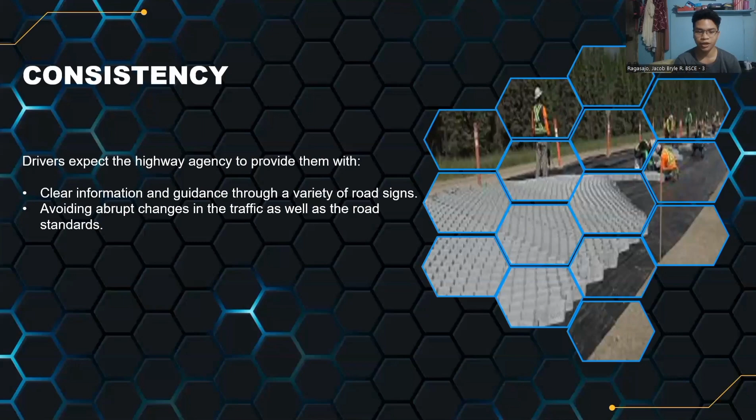AASHTO is the American Association of State Highway and Transportation Officials. In 1914, the American Association of State Highway Officials, or AASHO, was established as an association of state, territorial, and District of Columbia highway departments and the Federal Highway Administration. The name was expanded in 1973 when the Department of Transportation was integrated into the association, renaming AASHO to AASHTO, giving the officials of this agency the power to govern its operation.

Engineering activities were implemented by standing committees with the task of preparing specifications, manuals, and standards representing the current highway engineering practice. AASHTO publications include transportation materials specifications and tests, specifications for highway bridges, geometric design standards, and numerous policy statements and guides.

AASHTO publications are authoritative, meaning they are reliable, so all the information that AASHTO publishes is accurate or true. References are made in these books and periodic manuals. The association also publishes the AASHTO quarterly reports on current highway and transportation subjects, including trends, forecasts, and legislation.

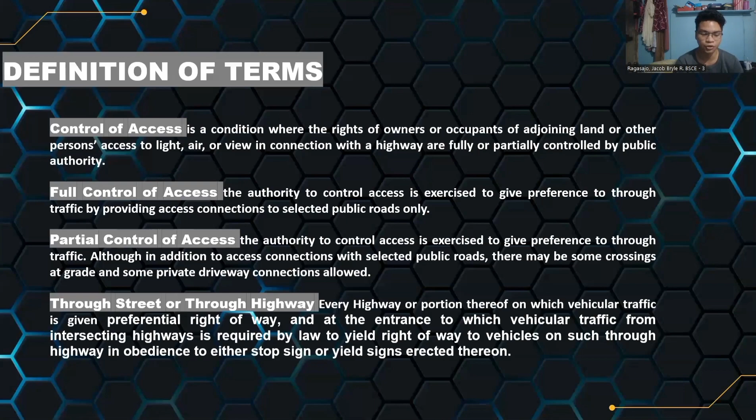Parkway is an arterial highway for non-commercial traffic. It is a wide road, usually divided, with an area of grass and trees on both sides and in the middle.

Arterial street is an arterial route that carries traffic to the nearest access point or through traffic. It often serves as the most advantageous route for relatively long distance travel. It is a road without controlled access that can carry a large volume of local traffic at a generally high speed, being below controlled access highways in the hierarchy.

So these are the basic considerations in planning arterial roadways. First is the selection of the routes, studies of the traffic volume, origin and destination, accident experience. Width should not be less than 15 meters, must carry at least one lane of traffic in each direction, should be at least 1 kilometer in length, should skirt neighborhood areas rather than penetrate them.

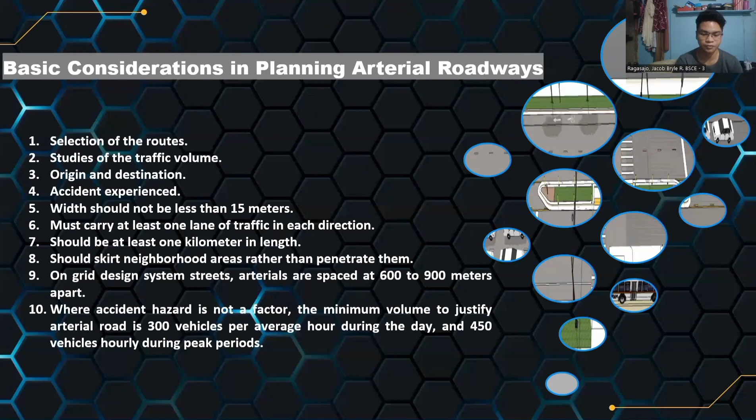On grid design system streets, arterials are spaced at about 600 to 900 meters apart, and where accident hazard is not a factor, the minimum volume to justify an arterial road is 300 vehicles per average hour during the day and 450 vehicles hourly during peak periods. And sometimes peak period volume on a designated arterial road exceeds the capacity of a two-way street. And to increase the arterial capacity, the following solutions are enforced.

During peak hours, parking is prohibited on one or both sides of the streets. Parking is prohibited several meters away from each side of the road, intersections, or corners. Right turn is allowed on red signals anytime with care. Left turns are eliminated at congested intersections, and the direction of the traffic is reversed in a center lane to provide more lanes in the direction of heavier traffic flow.

Collector streets. Collector streets form a smaller mesh grid pattern where passengers are picked up from service streets and carried to the arterials. So more like sumpay ni siya sa arterial roads or like a street padong sa arterial roads.

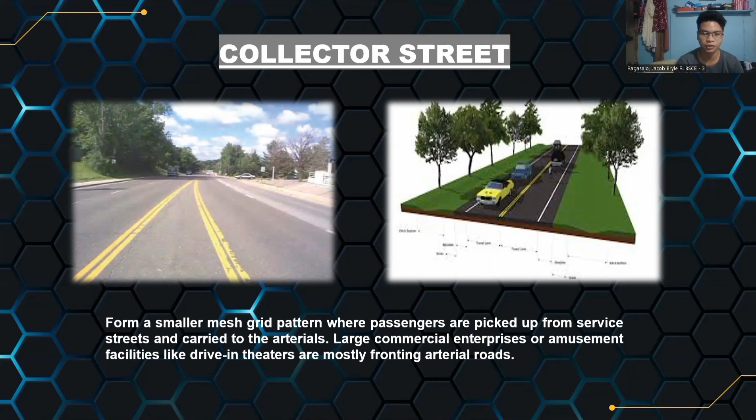So local road. Well, local road is defined as a street or road primarily for access to residents, business, or other adjoining properties. It is also defined as a road constructed and maintained by a local government. So it also refers to streets or roads na mo-accept og traffic from collector roads or streets and distribute the traffic through subdivisions, neighborhoods, and business areas.

So highway capacity. Highway capacity is defined as the maximum number of vehicles that are reasonably expected to pass a given point over a given period of time, usually expressed as vehicles per hour. So under ideal conditions, one freeway lane can accommodate about 2,000 passenger cars per hour, and a two-lane road can carry up to 1,000 passenger cars per hour in each direction. So there's an obvious relationship between vehicle speed and highway capacity. As the volume of traffic approaches capacity, the average speed is markedly reduced.

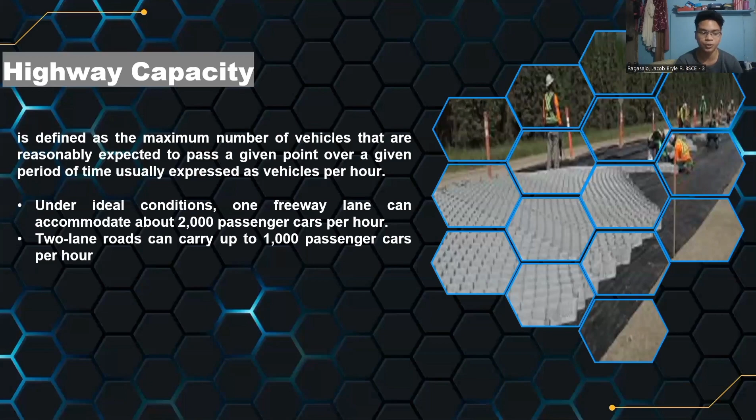Average annual daily traffic, or AADT, refers to a traffic volume or flows on the highway as measured by the number of vehicles passing a particular station during a given interval of time. It is also called average daily traffic if the period is less than 1 year. Volume may be stated on hourly observed traffic or estimated 30th hour volume commonly used for design purposes. This is determined by counting the total number of vehicles to cross a point in both directions on a highway during a year, and divide this value by the number of days in a year. So 365 days it divides, yeah.

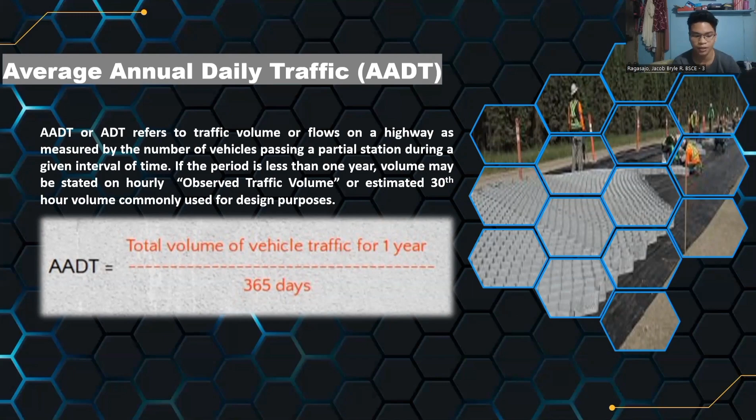So next is the design speed. There is no single set of geometric standards that will apply to all highways. For every highway segment, decisions regarding appropriate control for each of the many details or requirements must be addressed individually or separately. AASHTO defined design speed as the speed determined for design and correlation of physical features of a highway that influence the vehicle's operation. It is the maximum speed that can be maintained over a specific section of the highway when weather and traffic conditions are so favorable that the design features of the highway govern.

So, basic design features refers to the tightness and superelevation of curves, the sight distance, and the grade. So the design speed is basically higher than the anticipated average speed. And AASHTO recommended that the design speed be set to the greatest degree possible to satisfy the needs of nearly all drivers, both today and throughout the road's anticipated life. For economic reasons, the geometric features of certain road sections are designed for speeds from 30 to 50 kilometers per hour. Selection of the proper road design speed is one of the most important decisions to make because it sets the limit to curvature, sight distance, and other geometric features.

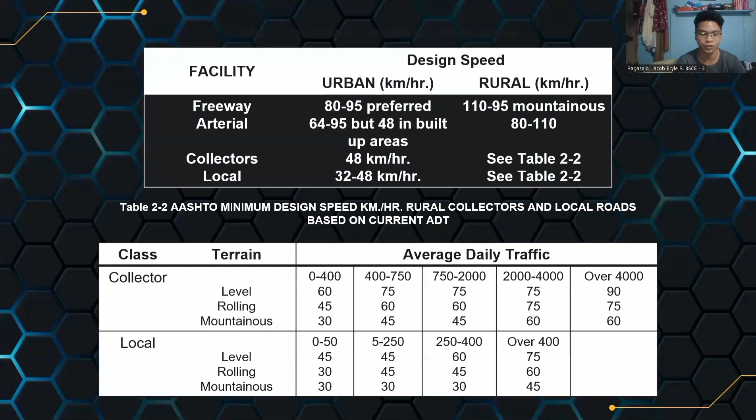So next is the cross-section of a typical highway. The cross-section of a typical highway has a latitude of variables to consider, such as the volume of the traffic, character of the traffic, speed of the traffic, and characteristics of motor vehicles and of the driver. Highway design usually adopted a cross-section that is uniform in thickness from end to end of the improvement.

This is acceptable on high-volume traffic road facilities, but for low-volume traffic facilities, modifications of features like shoulder width in rough areas are usually employed to reduce cost. So a cross-sectional design generally offers the expected level of service for safety.

And recent studies showed that a 7.20 meters wide pavement has 18% fewer accidents compared with a pavement narrower than 5.50 meters wide. And a 7.20 meters wide pavement has 4% fewer accidents than a 6 meters wide paved roadway. Accident records show no difference between 6.60 meters and 7.20 meters wide pavement.

For the 6 meters, 6.60 meters and 7.20 meters wide pavement with 2.70 to 3 meters wide shoulder, recorded accidents decrease by 30% compared to 0 to 0.60 meters wide shoulder and 20% compared with a 0.90 to 1.20 meters wide shoulder. It appears that the above difference in accident potential may not justify higher standards, particularly when traffic volume is low.

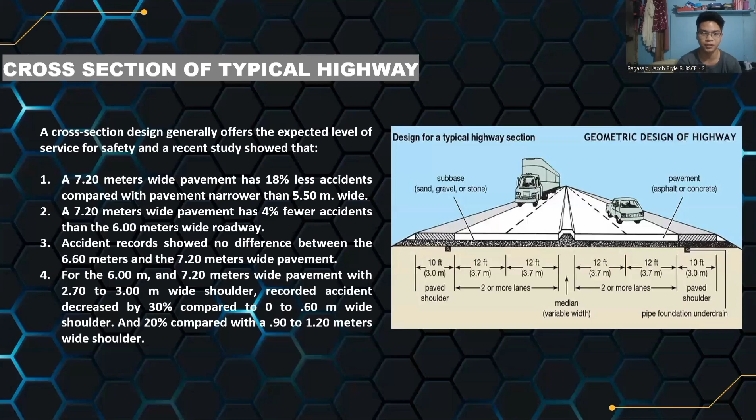For two-lane rural highways, a 7.20 meters wide surface is required for safety clearance between commercial vehicles and recommended for main highways. So in the cross-section of a typical two-lane highway, a 7.20 meters wide surface is required for safe clearance. And for collector roadways, a 6 meters wide surface is acceptable only for low volume traffic, including few trucks traveling thereon.

And for local rural roadways, the minimum surface width is 4.80 meters for a 30 km per hour design speed. And for urban roadways, the minimum design width is 3.60 meters, although 3 meters is also allowed where space is limited.

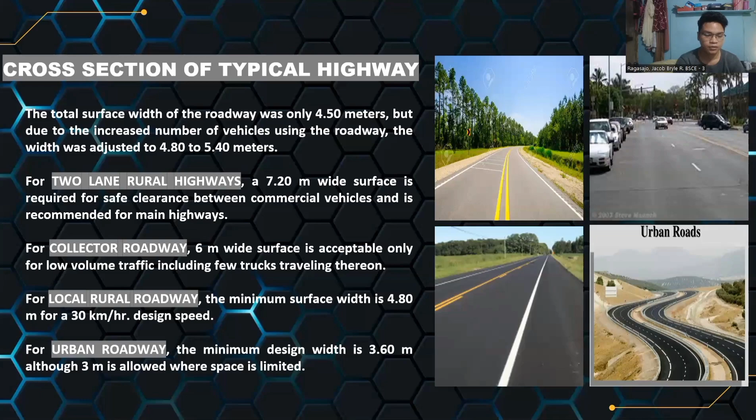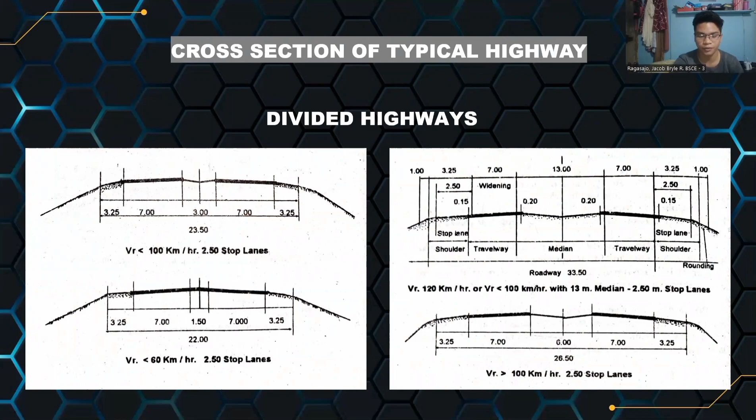Next is the road shoulder. Road shoulder or verge is defined as that portion of the roadway between the edge of the traffic lane and the edge of the ditch, gutter, curb, or side slopes.

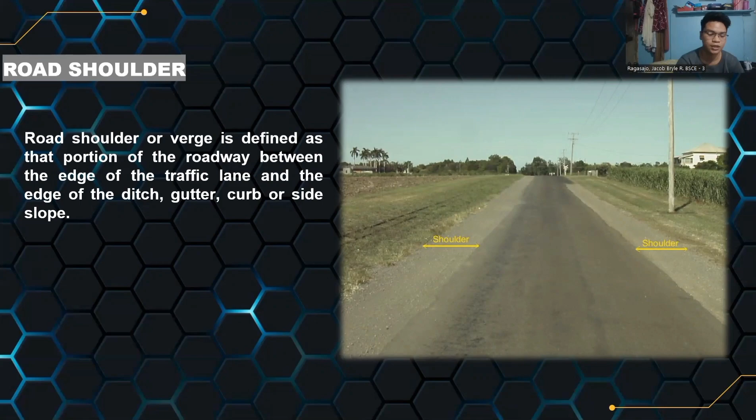So, the importance of road shoulder. Road shoulder serves as a place for vehicles to stop when disabled or for some other purposes. Road shoulders considerably reduce road accidents. The road capacity is decreased and accident opportunity increases if the shoulder is too narrow or omitted in the design.

Shoulder should be continuous along the full length of the roadway.

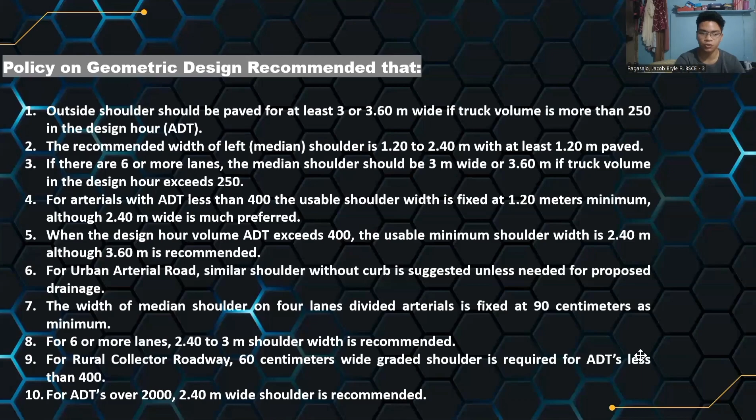For urban arterial roads, similar shoulder without curb is suggested unless needed for drainage purposes. The width of the median shoulder on 4-lane divided arterials is fixed at 90 centimeters as minimum. For 6 or more lanes, 2.40 to 3 meter shoulder width is recommended. For rural collector roadway, 60 centimeters wide graded shoulder is required for ADTs less than 400. And for ADTs over 2,000, 2.40 meters wide shoulder is also recommended.

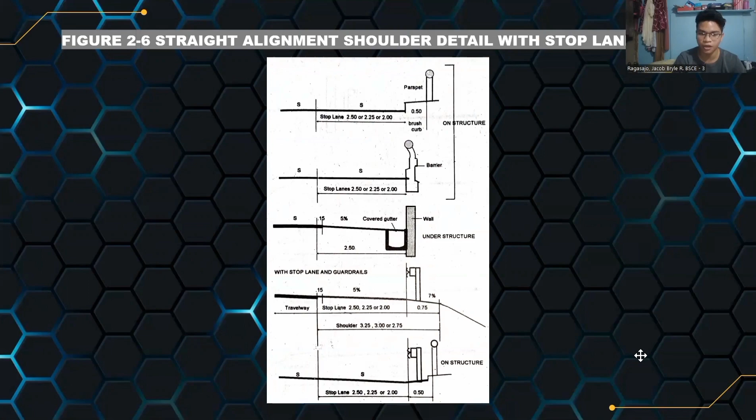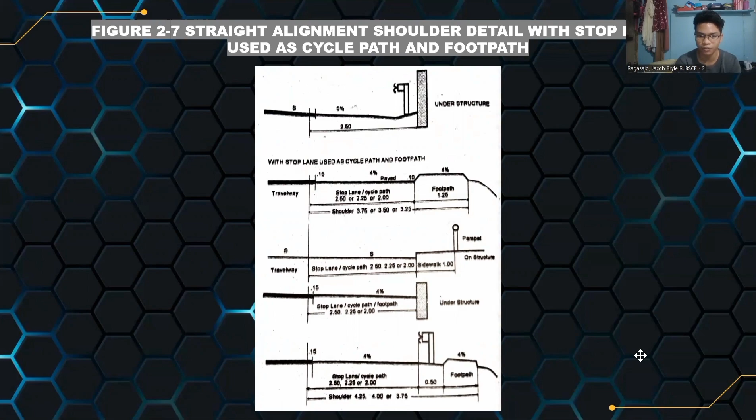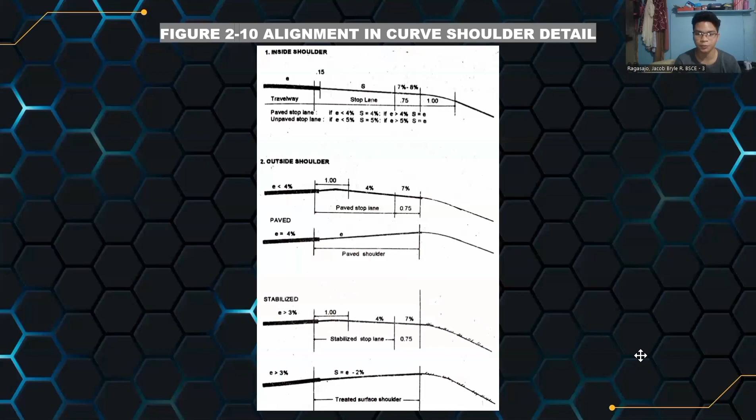Good day everyone, I am Luijan Equipado and today I'm going to discuss my assigned topic. The first topic is the cross slope. So what is the cross slope? The cross slope is provided in all tangent sections of the roadway. Slope usually falls in both directions of the center line of the two-lane highway, except where the super elevation of the curves directs all the water towards the inside.

Here I have a picture of a cross slope example. It's basically two slopes that cross each other at the center line of the roadway. For a high type pavement, the crown or slope is often in the 1% to 2% range. However, steeper slopes are strongly recommended. So here we have an example of the 1% to 2% slope, and as you can see, the example of the crown road is just like the road outside that has a 2% slope.

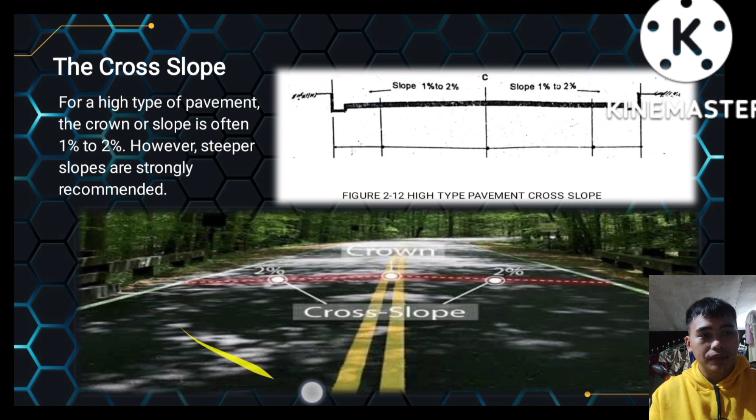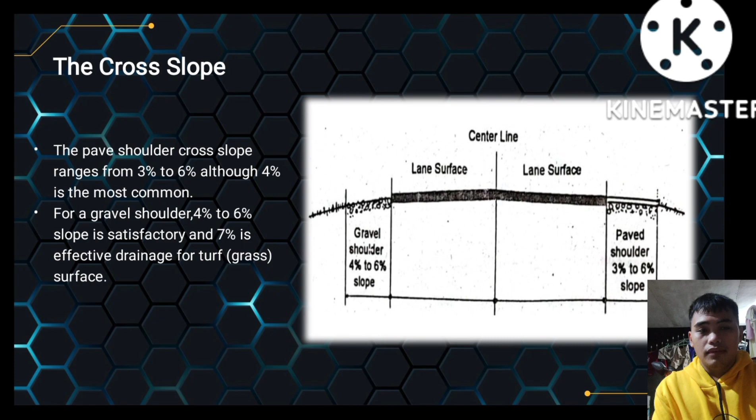So what is the purpose of the cross slope or steeper slope? The purpose is to reduce water on the road so that the driver can have a safe and comfortable driving experience. The cross slope also has a shoulder. It can be a paved shoulder or gravel shoulder. The paved shoulder cross slope ranges from 3% to 6%, although 4% is the most common. For the gravel shoulder, 4% to 6% slope is satisfactory, and 7% is effective drainage for turf surface.

Here I have an example of the paved shoulder and the gravel shoulder. The paved shoulder is made of cement, while the gravel shoulder is made of gravel or smaller rocks. There are also many types of road slope. The first is the cross slope, the most standard one. The second is the parabolic slope. It's only applicable if the gutter is deep enough to support draining water on the road, while if the gutter is not deep enough, it's advisable to use the combination of uniform slope with the parabolic curve. That's the third type of slope.

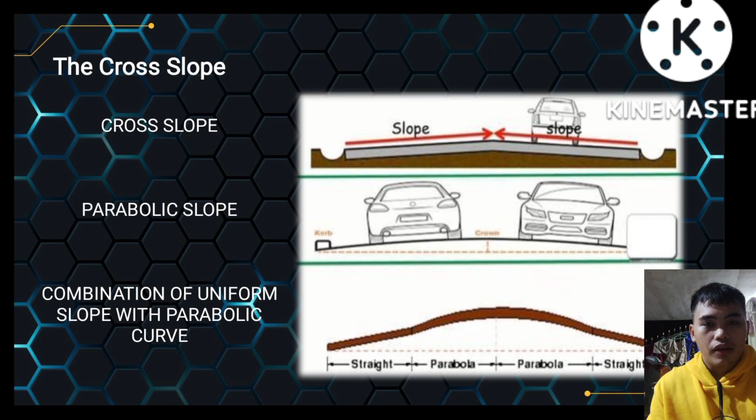Now we're going to move on to the next topic, the cut or fill slope. What is the cut or fill slope? From the word itself, cut means to reduce, and fill means to add. Here I have an example of cut or fill slope. As you can see in the picture, the mountain has been cut through and built with the road. On the left side of the picture, you can see the cut slope or back slope, and beside or at the bottom of the road, you can see the fill slope

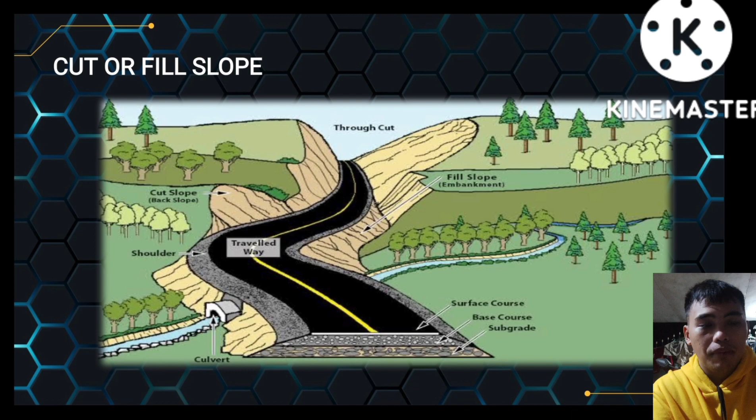So here, earth fill of normal height is safe on a slope of 1 and 2 ratio. Second is slope of cuts through an ordinary undisturbed earth fill remain in place with the ratio of 1 and 1 slope. Cuts could be as steep as 1 and 2 ratio, and sometimes 1 and 4 ratio proven to be stable.

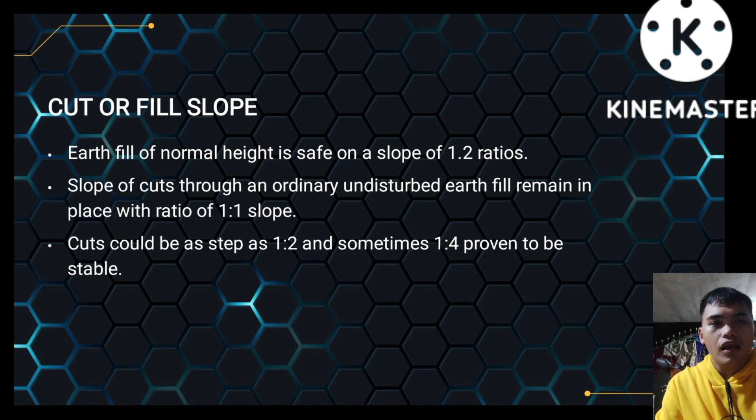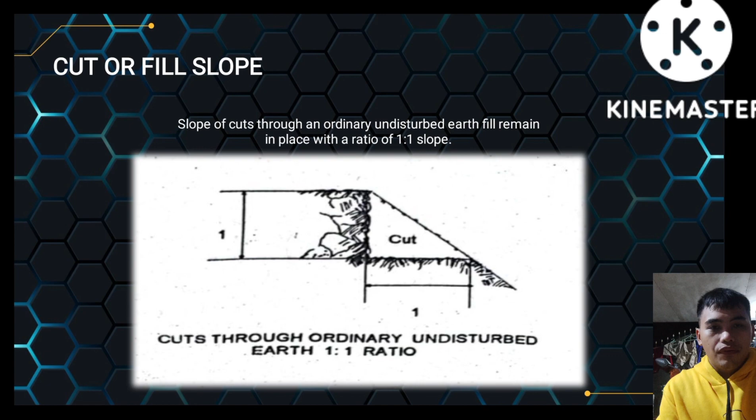Now we're going to talk about the advantages of the flat side or back slope. The first advantage is with a back slope of 3 and 1 ratio or even flatter, cars could be directed to back into the road and will come to stop or continue down the slope with no risk of overturning. Second, flat fill slopes are visible from the vehicle at full extent, giving the roadway a safer appearance.

Third, with a visible slope being low and flat, vehicles could be positioned or parked closer to the edge, and on two-lane roadways, parking would be farther from the opposing traffic.

There are also recommended policies on geometric design. We have three. First one is the 6:1 slope ratio be adopted on embankments less than 1.2 meters high and 4:1 on a higher fill. Second is the 1 and 2 slope ratio is allowed to height greater than 6 meters.

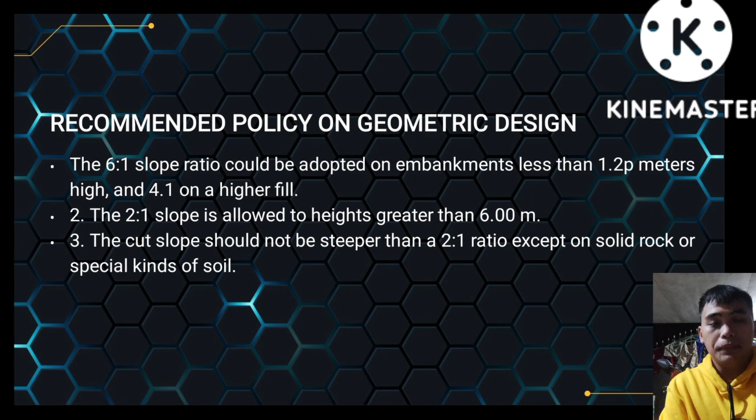Number 3, the cut slope should not be steeper than a 2:1 ratio except on solid rock or special kind of soil. Here is an example of the rock cut ratio from 1 and 2 or 1 and 4. It's only applicable on a special kind of soil or rock types.

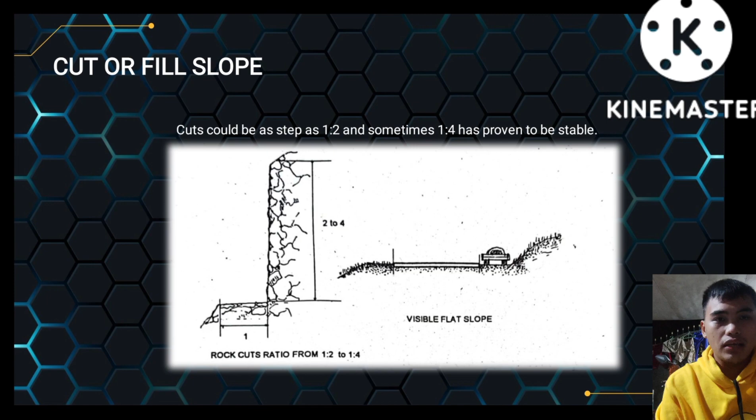The AASHTO also has a policy stipulated that where cut or fill slopes intersect the original ground surface, cross-sections must be rounded to blend the slope with the natural ground surface. When the side slope requires embankment with a suitable retaining wall, any of the following materials could be used depending on the natural condition. Here I have a first illustration or picture of the AASHTO policy.

The materials that could be used depending upon the natural condition for the retaining wall are first, hand-placed stone. Second, cement rubble masonry. Third, concrete blocks. 4, conventional reinforced concrete. 5, T or counterfort design. 6, cribs assembled from timber. 7, precast concrete. 8, metal elements. 9, tied back piling. And 10, lastly, earth reinforced with metal or plastic bands.

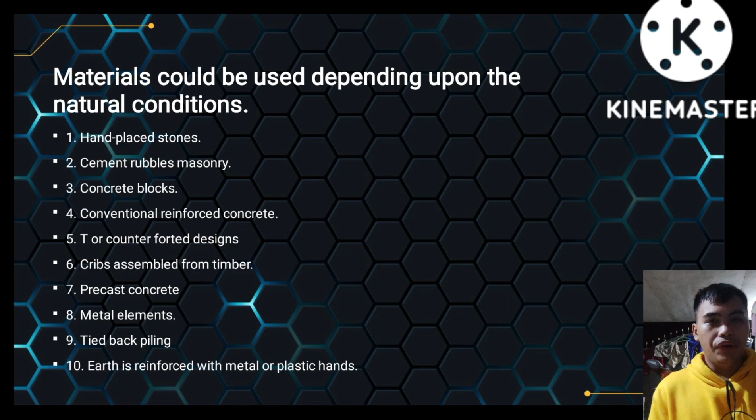The number of lanes. The number of lanes in a segment of highway is determined from the estimated volume for the design year AADT and highway lane capacity at the expected level of service. AASHTO policy accepts a dually divided 16-lane roadway with 4 lanes in each direction for an inner freeway and 4 more lanes in each direction on the outside.

Next is highway median. So what is a highway median? From the word itself, it means road and something in the middle of the road. It could be a barrier or flat surface with plants or signs. For example, the road near the Park Mall. As you can see, the road there has many types of medians, and its purpose is to prevent accidents.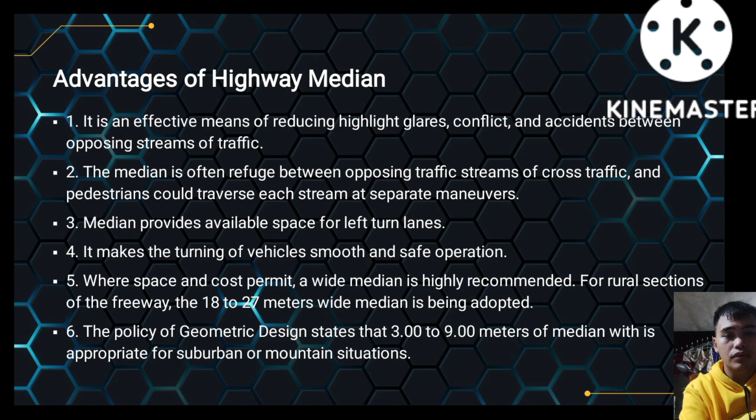Number 6. The policy of geometric design states that 3 to 9 meters of median is appropriate for suburban or mountain situation. Number 7 is for rural or urban arterials, 18 meters median or wider is preferable because it allows the use of independent profile and at the same time minimizes the crossover accident.

Number 8. Median with 6 to 18 meters wide allows drivers to cross each roadway separately. A 4.2 to 6.6 meter median will provide protection for turning vehicles. Number 9. Curbed median with 1.2 to 1.8 meter width serves as partition separation of opposite traffic and traffic control device.

Number 10. The width of traversable median should be wide enough to prevent vehicles running out of control from reaching the opposite traffic. Number 11. The 15 to 24 meter distance between lane edges is favored, but a specific value is not stipulated. Number 12. Cross slope of the median should not be greater than 6:1, but preferable is 10:1. Lastly, dense planting of rows of hedge serves as safe crash barriers.

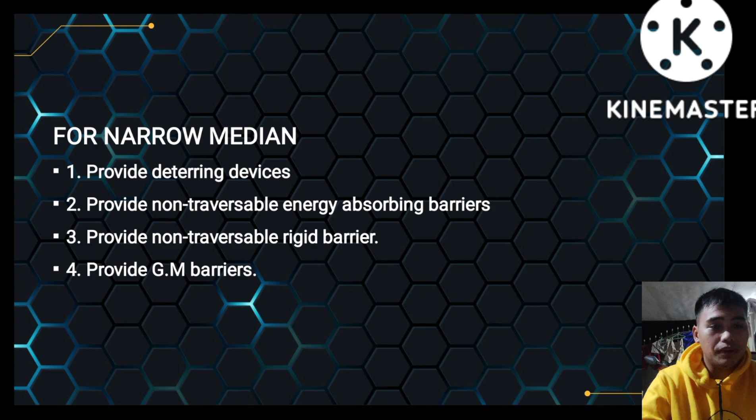For narrow median, you need to provide the deterring device, non-traversable energy absorbing device, non-traversable rigid barriers, and GM barriers. The deterring device is 2 sets of double stripes painted on the existing pavement, raised diagonal bars, low curbing, and shallow dishes. Non-traversable energy absorbing device: the chain link fence is 1 meter high and supported by steel posts and augmented by cables at the bottom and the midpoint.

Non-traversable rigid barriers are metal guardrails. And lastly, GM barriers are high non-mountable sloped face concrete barriers called New Jersey. It is cast or extruded in place or precast in sections and set in position by the crane.

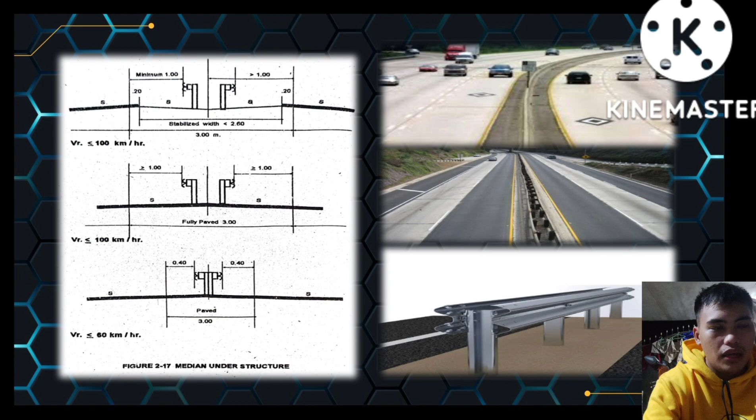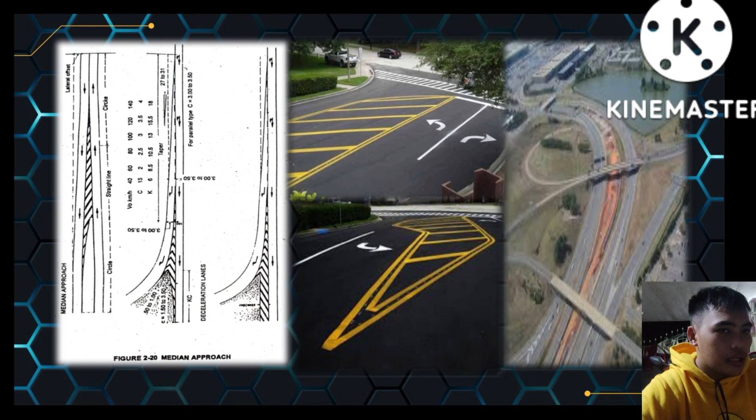And here I have an example of the deceleration lane and insertion lane. As you can see in the picture, the arrow here is saying that it is the traffic flow and you don't have to slow down here. Well, here as you can see, there is an arrow that forms a parabolic curve towards the posted safe speed for ramp, or it is called the slow down after turning into the deceleration lane.

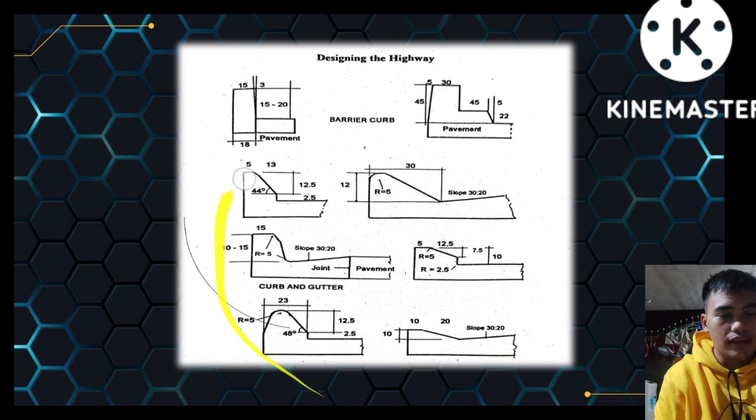And here are the design or the examples of barrier curbs. As you can see, they have different kinds and shapes, and also have a curb and gutter here. You can see this kind of barriers and curbs in the side of the road.

So the grade line provides a line of design on where to build a road. It also shows us which part of the mountain will be cut off and which will need to be filled up with soil.

So in laying the grade line, the designer must consider the following. The first is where earthworks is minimal and consistently meeting sight distance in relation to grade line. The economy is one of the main considerations. Second, in mountainous areas, the grade line must be considered to balance excavation against embankments to get minimum overall cost.

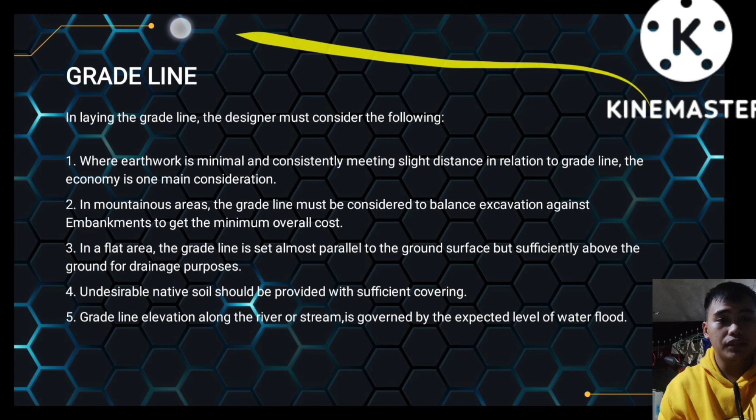Vertical curve over crest. Crest vertical curves are curves that connect inclined sections of roadway, forming a crest, and they are relatively easy to design.

The principal control in the design of crest vertical curves is to ensure that minimum stopping sight distance, or SSD, is available throughout the vertical curve.

All vertical curves should not be shorter than the established minimum over crest. This is governed by the sight distance requirements, but sometimes a case of riding may demand longer curves than the sight distance. Some designers prefer no vertical curve to be shorter than 300 meters.

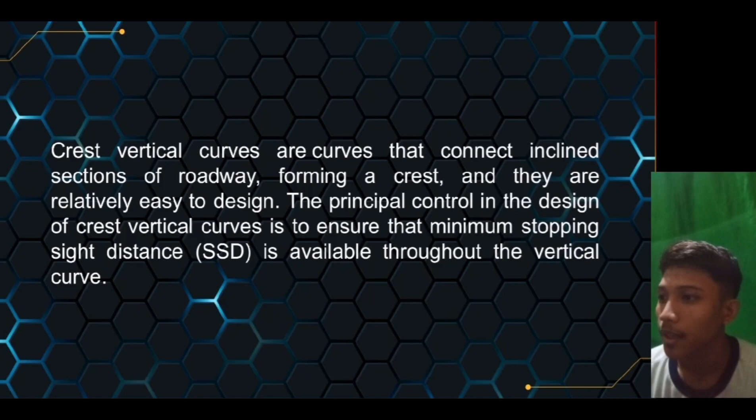The minimum curve length was suggested by AASHTO, the American Association of State Highway and Transportation Officials, to be 8 times the velocity in kilometers per hour for a distance in meters.

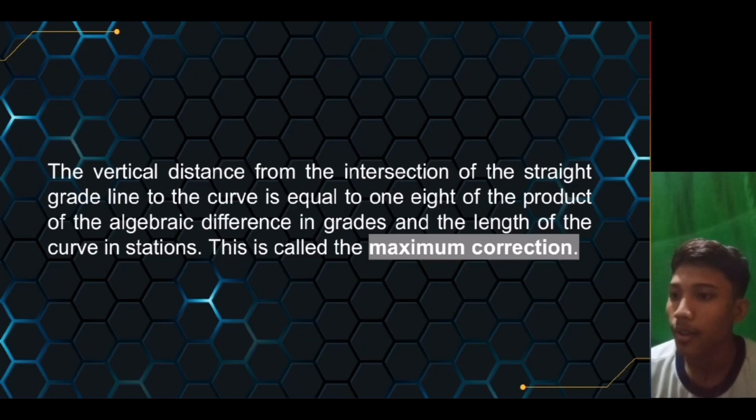The vertical distance from the intersection of the straight grade line to the curve is equal to 1/8 of the product of the algebraic difference in grades and the length of the curve in stations. This is called the maximum correction.

The rate at which the curve departs vertically from both tangent grade lines is proportional to the square of the horizontal distance from the end of the curve.

The correction at any intermediate point is obtained by: 1, multiplying the maximum correction by the square of the horizontal distance between the near end of the curve and the point. 2, divide this product by the square of 1/2 the length of the curve.

The sight distance and the length of the curve can be related to each other in one of two ways. The first possibility is that the sight distance is less than the length of the curve. Alternatively, the length of the curve could be less than the sight distance. This is the illustration.

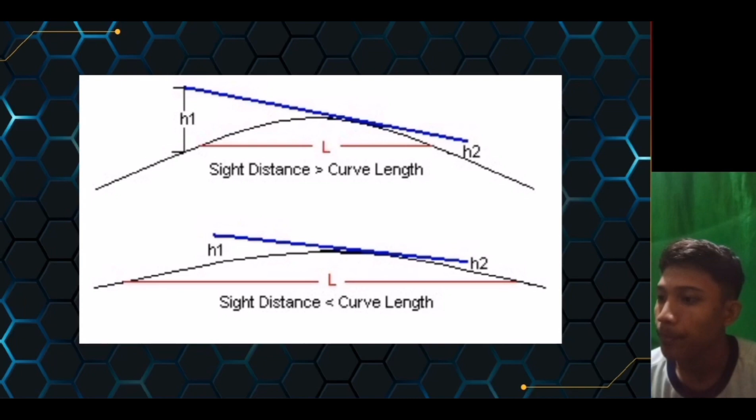Right of way. Railway right of way means a strip of land that is granted through an easement or other mechanism for transportation purposes. A right of way is reserved for the purposes of maintenance or expansion of existing services within the right of way.

It is a right to make a way over a piece of land, usually to and from another piece of land. A successful freeway and expressway operation closes the roadway from direct access to adjoining property and some local roads or streets. If local traffic and land use are to be opened, it must be served by service roads originally planned as part of the main freeway.

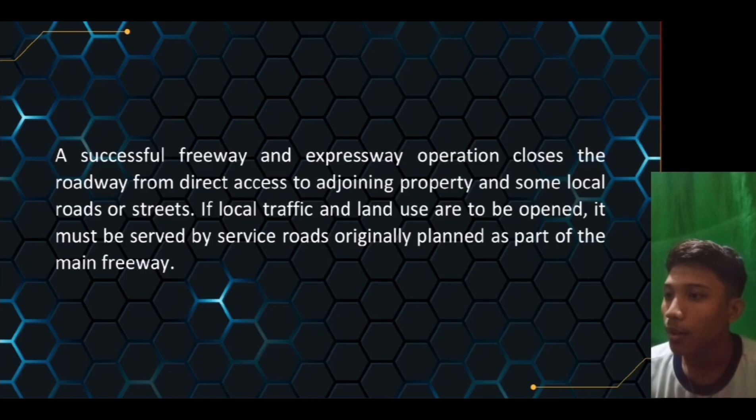Frontage road shall be permitted to enter connecting cross streets only at a distance of at least 100 meters for rural roads and 50 meters for urban conditions.

So this table shows the minimum right-of-way widths for rural and urban freeways at grade, in meters.

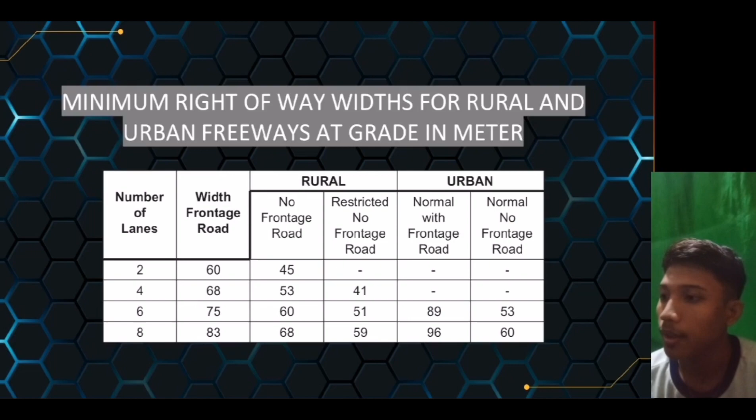Stopping sight distance. Stopping sight distance is one of the several types of sight distance used in road design. It is a near worst-case distance a vehicle driver needs to be able to see in order to have room to stop before colliding with something in the roadway, such as a pedestrian in a crosswalk, a stopped vehicle, or road debris.

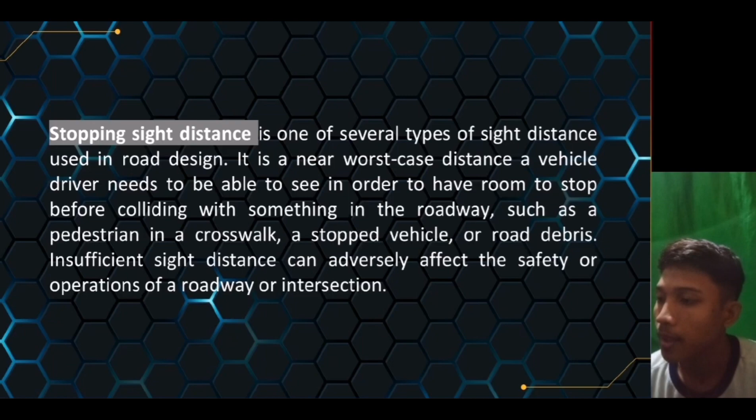Insufficient sight distance can adversely affect the safety or operations of a roadway or intersection. It is defined as the longest distance that a driver could see the top of an object 15 centimeters above the road surface, where the design height of the driver's eye above the pavement is 105 centimeters.

Stopping distance is made up of two elements: 1, the distance traveled after the obstruction or object is seen and before the driver applies the brakes; 2, the distance consumed while the driver applies brakes for the vehicle to stop.

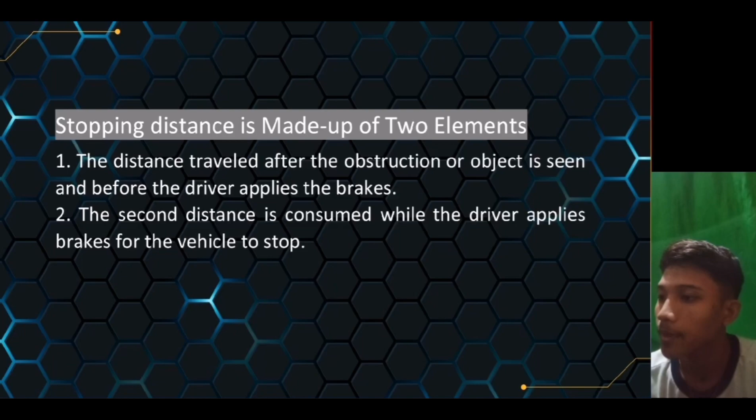The distance covered could be expressed by the formula D equals T times M over S. Braking distance D is equal to M over S squared over 2GMF, or D is equal to M over S squared over 19.6F, where M over S is equal to initial speed in meters per second.

T is detection, recognition, decision, and response initiation. G is acceleration of gravity, 9.81 meters per second squared. F is the coefficient of friction between the tire and pavement.

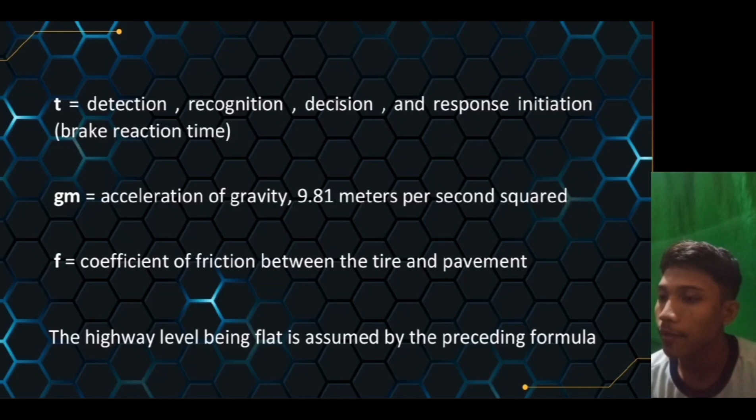The highway being flat is assumed by the preceding formula. The braking distance is decreased when traveling uphill, while it is increased when traveling downhill.

The following formula can be used to express the braking distance on slopes: braking distance D is equal to M over S squared over 19.6 times F plus G, where G is the longitudinal slope of the roadway, or percent grade over 100. Uphill grade is positive while downhill grade is negative.

Passing sight distance is needed where passing is permitted on two-way highways to ensure that passing drivers who use the lane normally reserved for opposing traffic have a sufficiently clear view ahead to minimize the possibility of collision with an opposing vehicle.

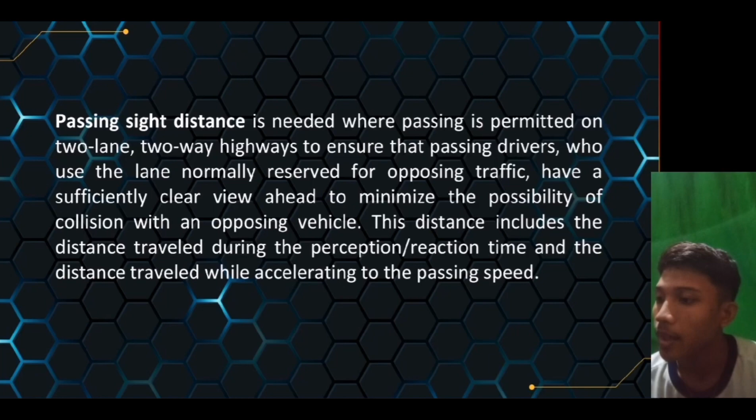The distance includes the distance traveled during the perception or reaction time and the distance traveled while accelerating to the passing speed. It is the longest distance that a driver can see the top of an oncoming vehicle while the driver's eye level is 1.05 meters above the pavement surface.

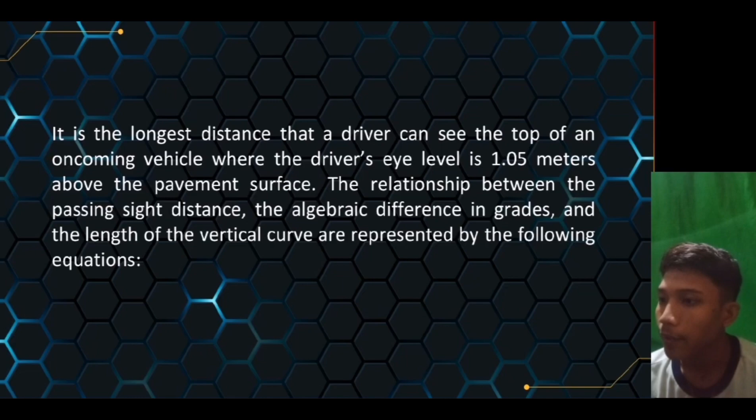The relationship between the passing sight distance, the algebraic difference in grades, and the length of vertical curve is represented by the following equations: L equals 2S minus 943 over A, where S is greater than L; and L equals AS squared over 943, where S is less than L, and L is length in meters. L is the length required of vertical curve, S is the specified sight distance, and A is the algebraic difference in grades expressed in percent.

The design of two-lane highway passing over a crest is generally practical only on flat grades, because longer vertical curves are required to provide passing sight distance than stopping sight distance.

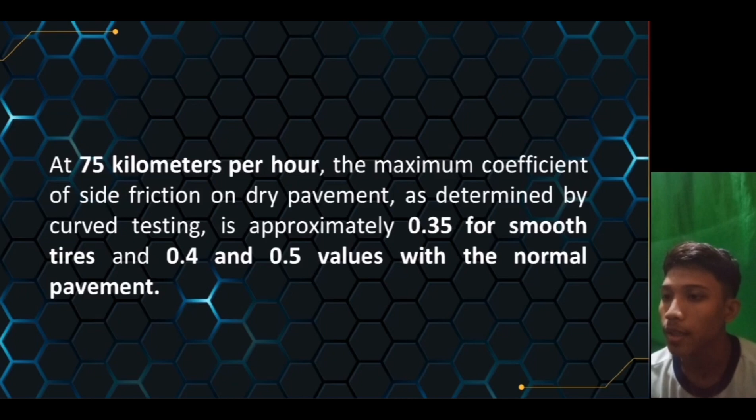At 75 km per hour, the maximum coefficient of side friction on dry pavement, as determined by curve testing, is approximately 0.35 for smooth tires, and between 0.4 and 0.5 for normal pavement.

Road alignment is the route of the road, defined as a series of horizontal tangents and curves. The profile is the vertical aspect of the road, including crest and sag curves, and the straight grade lines connecting them. It should be consistent.

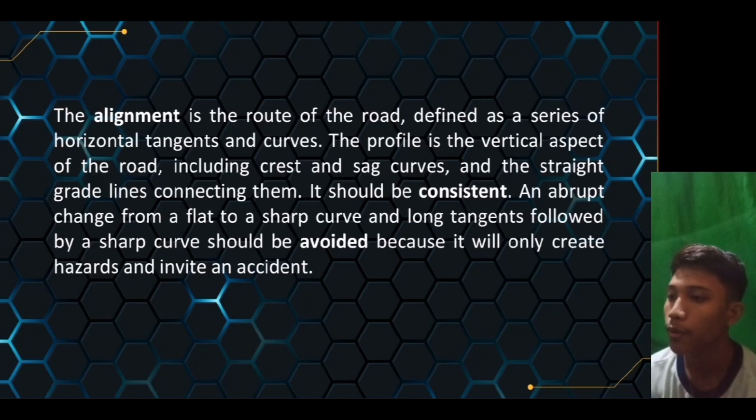An abrupt change from flat to sharp curve, and long tangents followed by sharp curves, should be avoided because they create hazards and invite accidents. There are two types of road alignment: horizontal alignment, which includes straight stretches and curves, and vertical alignment, which includes upward or downward gradients.

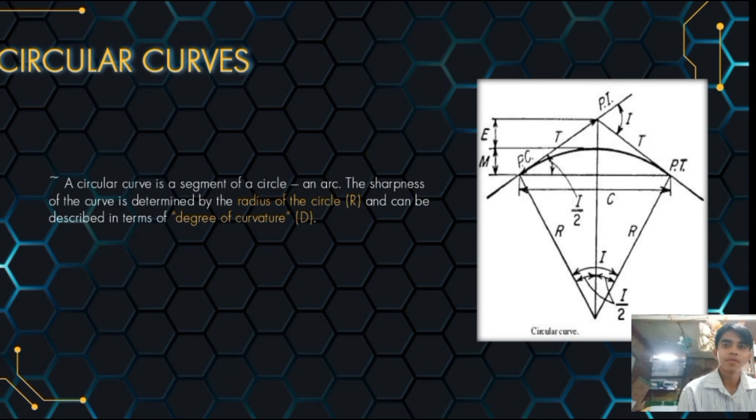Circular curves. A circular curve is a segment of a circle, an arc. The sharpness of the curve is determined by the radius of the circle and can be described in terms of degree of curvature. A vehicle traveling on a curved road is subject to centrifugal force.

This force is balanced by equal and opposite forces developed through the super elevation and side friction. The sharpness of a curve depends on its radius, and the degree of curve is inversely proportional to the radius.

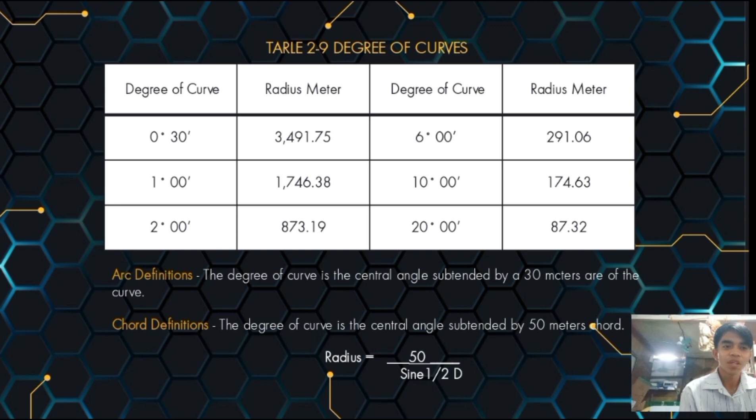The maximum allowed super elevation rate before was 0.12, but now it's 0.10, except on low volume gravel roads.

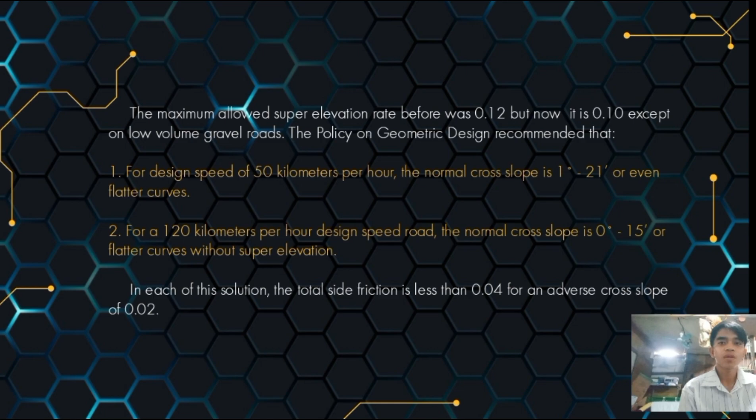The policy on geometric design recommends: first, for a design speed of 50 km per hour, the normal cross slope is 1 degree to 21 or even flatter curves. Second, for a 120 km per hour design speed road, the normal cross slope is 0 degrees to 15 or flatter curves without super elevation. In each of these solutions, the total side friction is less than 0.04 for an adverse cross slope of 0.02.

Super elevation runoff is the length of the roadway required to change the outside lane cross slope from a flat cross slope to a fully super elevated section.

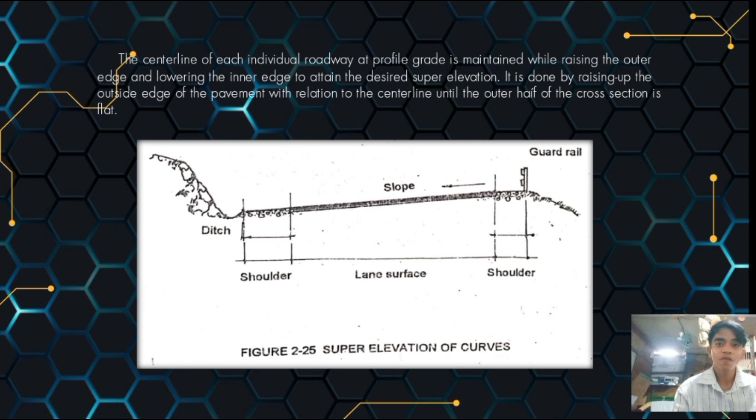AASHTO, the American Association of State Highway and Transportation Officials, recommended the runoff length to vary both with super elevation rate and the design speed, but with minimum standards of appearance and comfort to riders.

A roadway that lies in a cut where the grade line is nearly flat may create a sag by lowering its inner edge. This may not drain surface water properly. It is recommended that 60% to 80% of the runoff from a super elevated alignment should be on a tangent. It's possible to achieve super elevation by raising the outer edge of the alignment twice the usual distance.

So for a wider roadway, the length given on table 2.9 should be increased as follows: first, if 4 lanes, the individual value is increased by 50%; next, for 6 lanes, the individual value is increased by 100%.

Widening of curves: a provision for a wider roadway is necessary on sharp curves for 2-lane pavement for the following reasons. First, to force drivers to shy away from the pavement edge. Second, to increase the effective transverse vehicle width for non-tracking of front and rear wheels. Third, to give additional width due to the slanted position of the front wheel relative to the roadway's center line.

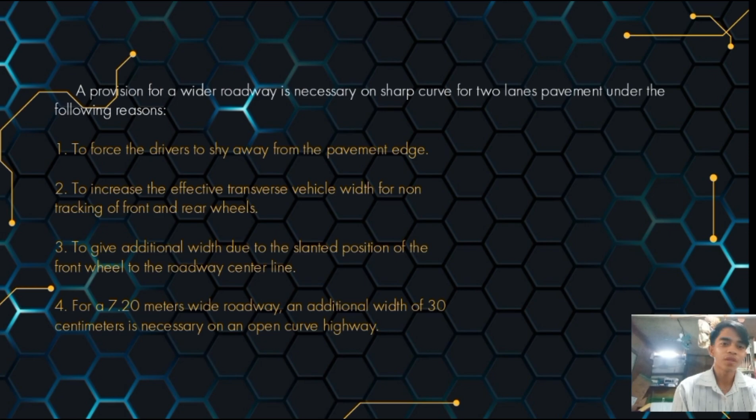Reverse circular curves are seldom used on modern highways, but reverse curves provided with proper length easements between them are acceptable. If no easement curve is allotted, curves of opposite direction should be separated by a tangent several meters long. Roads with compound curves that change abruptly from one sharpness to another confuse drivers, and in turn they shift position within the lane and sometimes veer out of it.

Compound circular curves of different radii are considered poor design, especially in rural areas. AASHTO recommends again that the radius of the flatter curve for rural highways should never be more than 50% greater than that of the sharper one.

For urban intersections, an easement curve is considered, which introduces changes in radius gradually. Super elevation changes along this transition section.

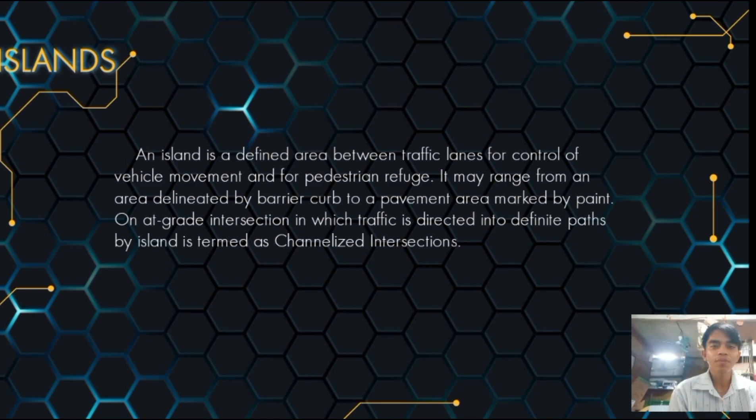Islands: an island is defined between traffic lanes for control of vehicle movement and for pedestrian refuge. It may range from an area delineated by a barrier curb to a pavement area marked by paint. An at-grade intersection in which traffic is directed into definite paths by islands is termed a channelized intersection.

Islands are included in the design of intersections for the following purposes: first, separation of vehicular flows; second, separation of conflicts; third, reduction in excessive pavement areas; fourth, regulation of traffic and indication of proper use of intersections; fifth, arrangement to favor a prominent turning movement; and the last one, location of traffic control devices.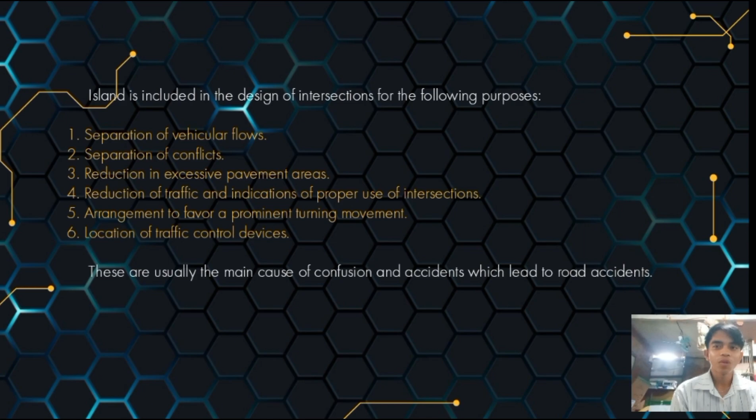These are usually the main cause of confusion and accidents, which lead to road accidents. When cross traffic meets at a flat angle, head-on collisions could be more serious. A right angle of 75 to 105 degrees is most favorable, giving the driver the opportunity to assess and calculate the position and speed of oncoming vehicles. By channelization, funneling is also effective in preventing overtaking and passing in conflict areas.

A well-studied super elevation is an important adjunct to channelization that regulates vehicle speed. First, prohibited turns are prevented. Next, refuge may be provided for turning or crossing vehicles and pedestrians.

Figure 226 shows general types of shapes of islands. The angle between intersecting streams of traffic can be made smooth and favorable. Prohibited turns may be prevented. Speed of vehicles is controlled on approaching intersections.

Funneling vehicles into a narrowing opening prevents overtaking and passing conflicts in the area, and refuge is provided for turning vehicles. Then lastly, drivers are commanded to merge into moving traffic streams.

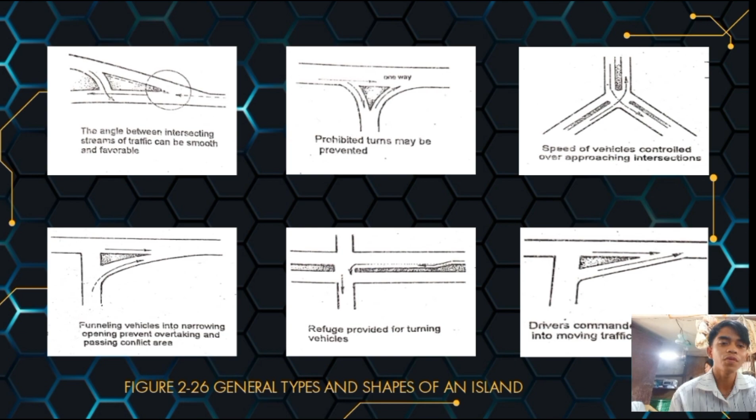Third, by channelization, refuge may be provided for turning and crossing vehicles and pedestrians. Fourth, the driver has to face only one decision at a time, hence conflicts can be avoided. The last one: it provides location for traffic control devices like signs, signals, and refuge for pedestrians.

Types of interchange. The form of freeway interchange requires selection of the configuration that is best suited to a particular situation and demand. The functions of freeway interchanges are: first, to provide separation between two or more traffic arteries. Second, to facilitate the easy transfer of vehicles from one artery to the other or between local roadway and the freeway.

Diamond type interchange is recommended where the freeway crosses a non-freeway arterial, and the cloverleaf type interchange is recommended for freeway and arterial intersections. Intersecting arteries are separated and free of intersections. The diamond interchange is the most cost-effective form of interchange.

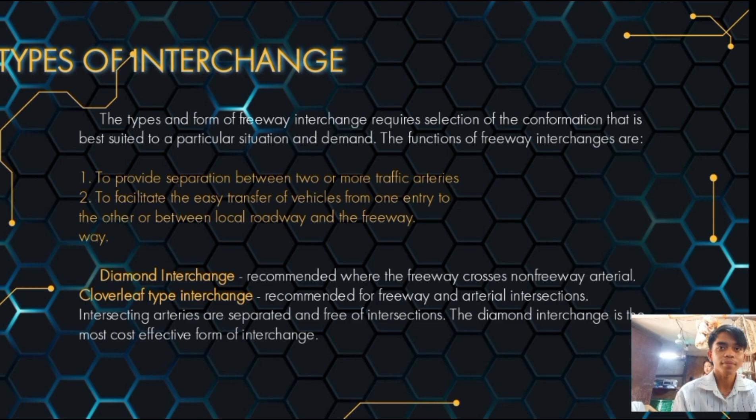Objections to the cloverleaf interchange design. First objection, it requires a large area of land. Second, at higher design speed, more time is consumed just to traverse the longer loops. Third, vehicles making a left turn execute a 270 degree right turn and travel greater distance, becoming unpleasant and hazardous due to the sharp curves and steep grades. Last one, vehicles leaving the curved loop in one quadrant weave with those entering the adjacent loop from the through roadway.

Under this type, weaving and merging movements are separated. Alternative cloverleaf design with collector-distributor is recommended for one or two through streets if added paving and structures can be justified. When freeway meets freeway, where traffic movement is heavy, the interchange is provided with directional left turns in all 4 quadrants.

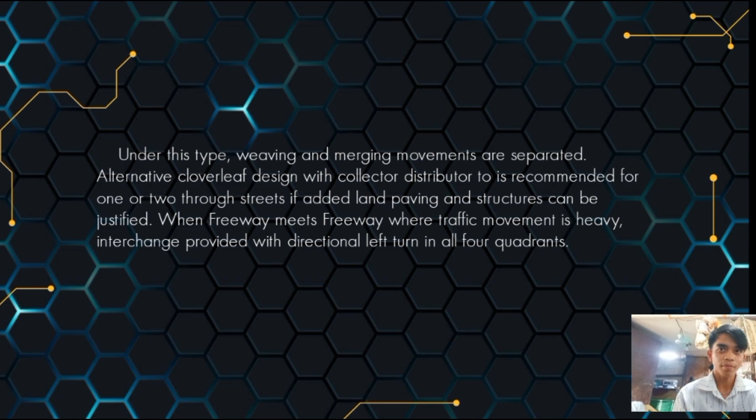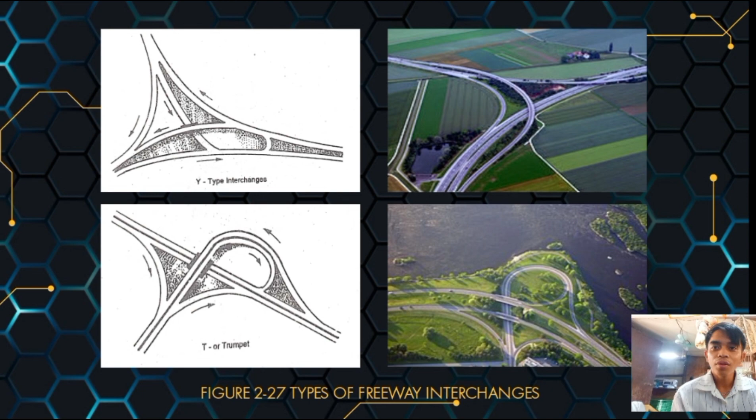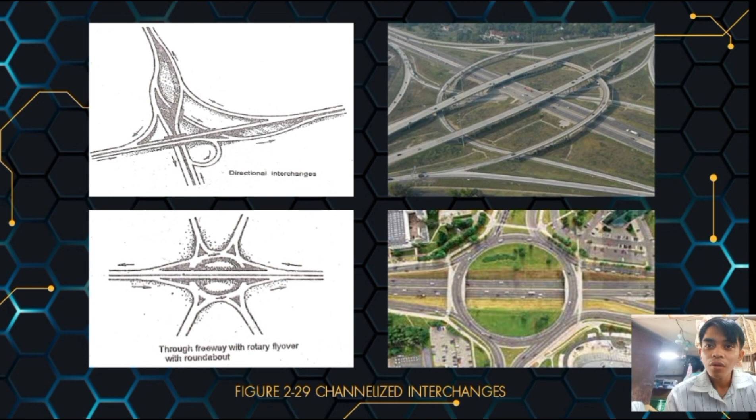Good afternoon, everyone. So today I will continue our topic and I will talk about highway intersections at grade. So it is stated that all highways except freeways have intersections at grade. The intersection area is considered to be part of the connecting road.

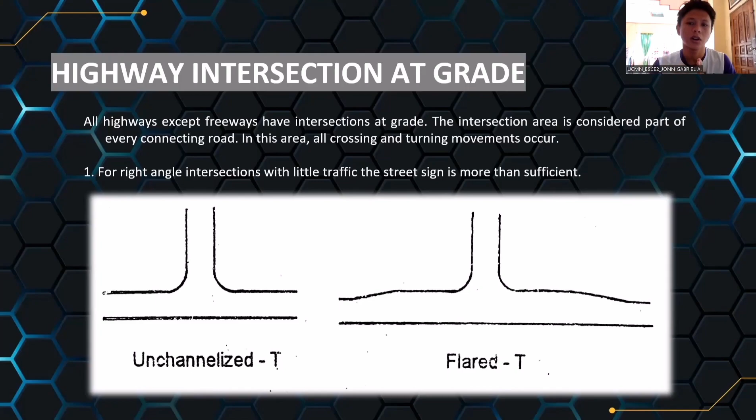So for number 2, for Y intersections or other related configurations where vehicles meet at unfavorable angles, it may require channelization.

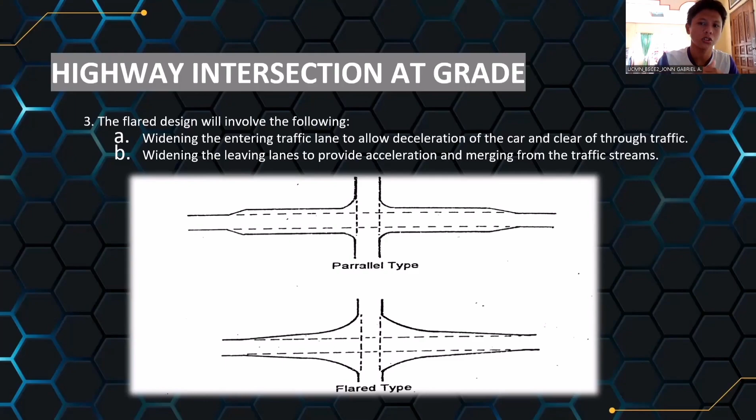The next, number 4, is intersections must accommodate large trucks, and the radius of all curves must be sufficient enough to accommodate them.

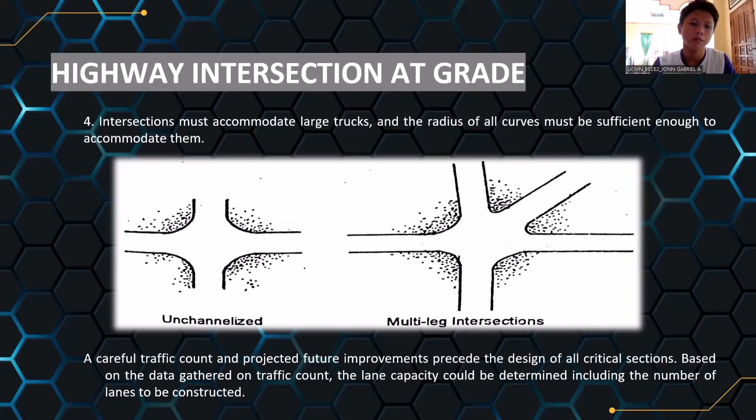So it must accommodate these large trucks. So a careful traffic count and projected future improvements precede the design of critical sections. Based on the data gathered on traffic count, a lane capacity could be determined, including the number of lanes to be constructed. So my next subtopic is freeway entrance and exit.

So on a single lane on-ramp, vehicles flow into the outer continuing freeway lane. The design is either a tapered blending to the lane or an auxiliary lane parallel to the through lane. In either case, sufficient length is required to allow the vehicles to accelerate and merge into ongoing vehicle streams at speed near to the freeway.

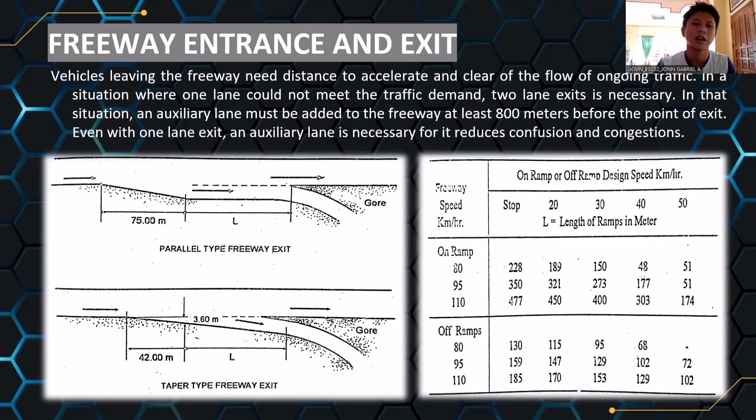So, railroad and highway separation. The main question asked in a railroad and highway separation is whether one is to go over the railroad or the highway. So what are your ideas? Let's get into it. If the highway is to go over the railroad, the structure itself is lighter and the highway load is much smaller than the railroad loads. With regard to the vertical clearance height, the railroad requires a minimum of 7 meters as against 4.8 meters clear distance above the highway.

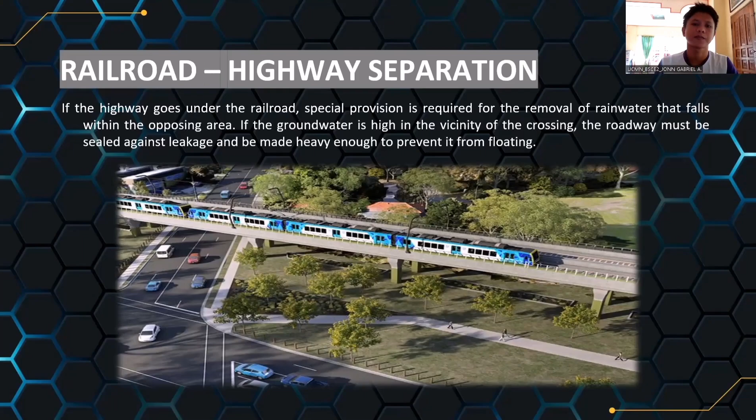So, for the last topic of our group is the bicycle lane. Bicycle lane is now becoming popular due to energy crisis and traffic problems. It requires a separate road for the riders that is entirely separate from the vehicular traffic.